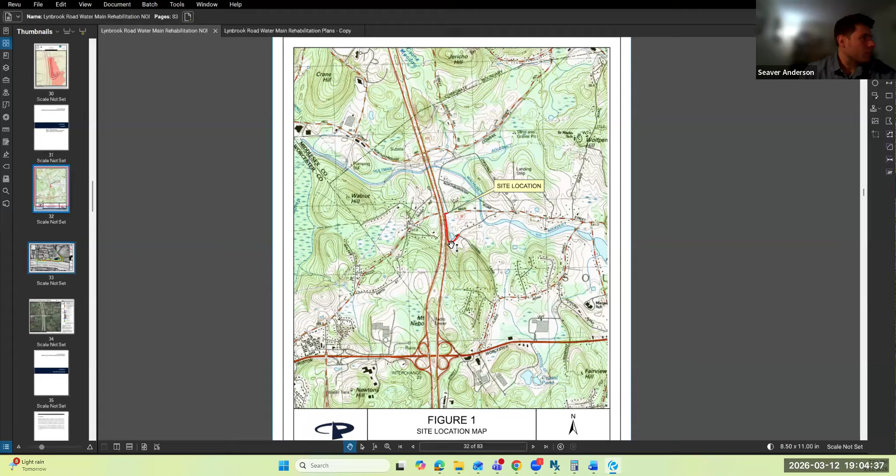Main Street, also State Route 30, runs east to west at the northern end of the project limits. Lynbrook Road runs at the southern end, it dead ends right along I-495 here. So the project is taking place within an existing utility easement and also within portions of both Main Street and Lynbrook Road. You can see it's highlighted in red here.

I'll show you an aerial view of the site. So there's an existing water main in this location. As you can see, it comes down Lynbrook Road, then crosses and runs parallel with I-495 north, and ties into the water main in Main Street.

Wetland resource areas primarily consist of a network of intermittent streams flowing in a northerly direction. Coming from this wetland complex, it crosses under Lynbrook Road via a culvert, enters into a small impoundment - there's a little dam that impounds the stream here - and then continues north into this marsh complex before crossing under Main Street. There are several bordering vegetated wetlands that border on the intermittent streams, as well as several others you can see in blue here.

There are several other streams that discharge from culverts along the toe of the 495 embankment. None of these streams are mapped, or their mapping is intermittent, on the USGS topographic maps. We also checked USGS stream stats, and the watershed size is less than a quarter square mile, with only 14% stratified drift, so they all fall well within the definition of intermittent under the Wetlands Protection Act. So we have no riverfront area on the site, but we do have buffer zone and the local 20-foot no-work zone associated with the wetlands and the streams.

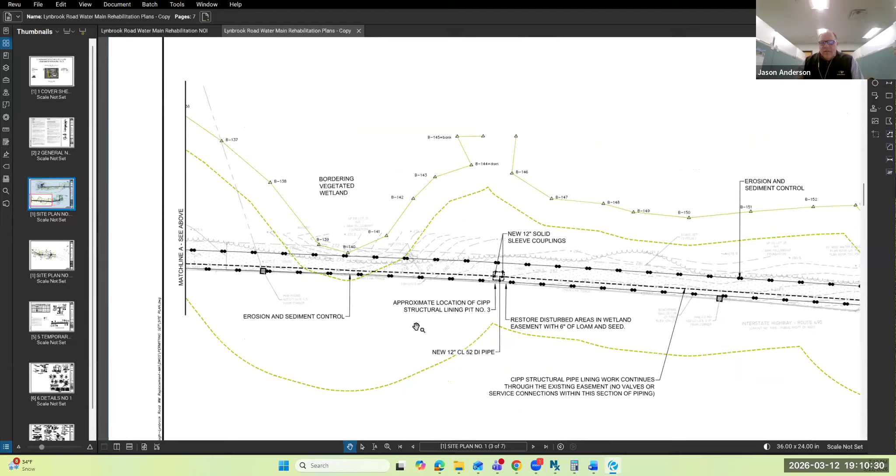This is our third pit. The company that makes this product, Aqua-Pipe, needs to open up a pit every 400 feet or so. So we picked the pit locations to be outside of the stream areas, just to keep the disturbance down. So yeah, if you can go more that way, and then once we come out of the easement...

Then we start heading east up Lynbrook. We're going to replace some of the piping there and just continue up, and we're going to have a couple more of these pits until we get to Lovers Lane. Lovers Lane is where we'll be—part of this project. Hopefully there'll be some money where we can start going down Lovers Lane now that we're out of the wetland area, for regular open cut excavation for water main replacement.

Which is kind of what you typically see. Just some valves we're going to be adding, some sleeves. And then this one residence here, if need be, we'll put them on bypass, feed off the hydrant for them if we need to take their water supply away for a little bit. But again, this class 4 structural liner is used throughout the whole process, inside of the 12-inch asbestos cement pipe.

Probably, like I said, it's the less intrusive way of doing this, versus an open cut all the way through the easement that's in the wetland. So that's the big bonus of using this product, and it's been successful in a lot of applications in Massachusetts.

The total excavation area within the buffer zone is limited to 280 square feet. The nature of just the excavation pits really reduces the amount of excavation needed, and that's all within either maintained grass easement or paved roadway.

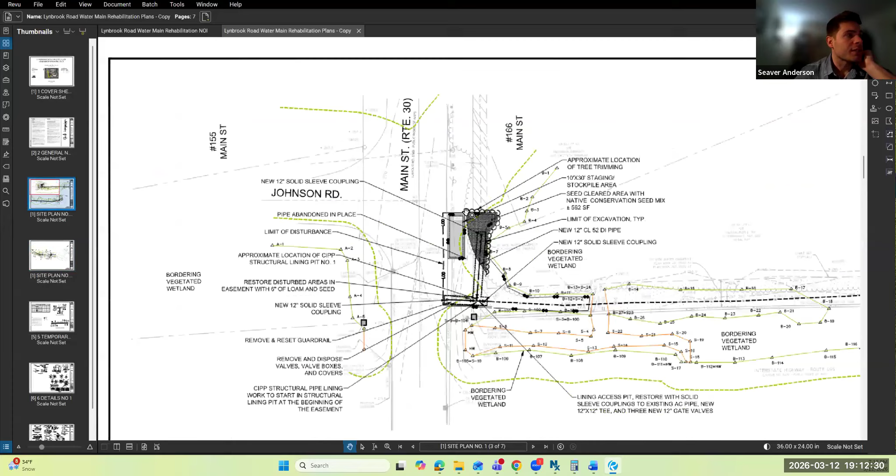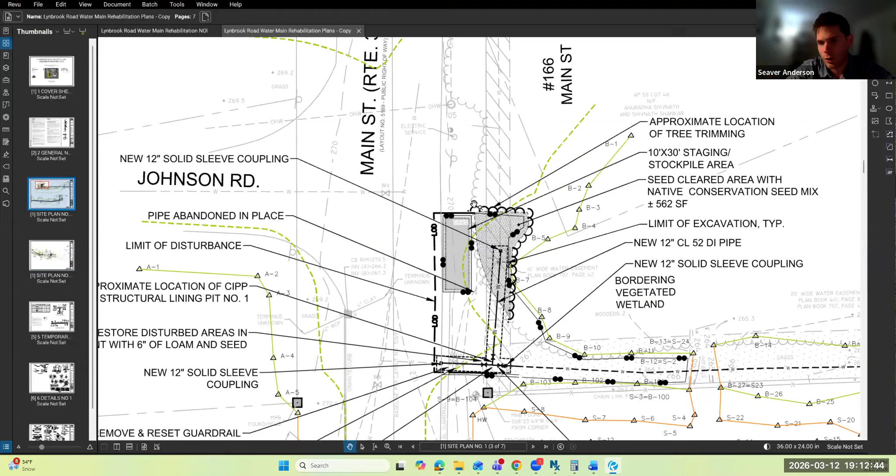The only disturbance in the buffer zone to actual natural vegetation is up at the very northern end. There'll have to be some clearing right along Main Street, clearing this tree line that was provided by the surveyor, more so capturing the canopy. There's some shrub and vine vegetation there, regularly maintained by the state since it's within the state highway right of way. It's subject to pretty regular maintenance by the DOT, but we're proposing that it'll have to be cleared for this open cut, and it'll be restored with a native conservation seed mix.

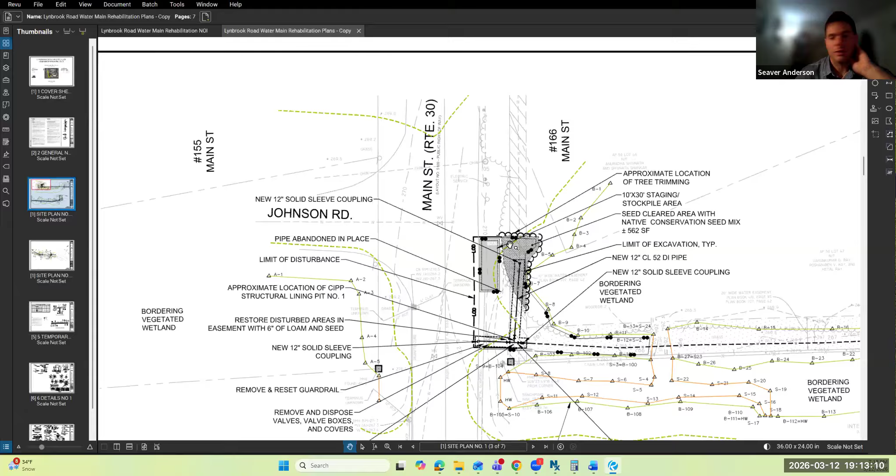Less likely to be cut by the DOT when they come by, but also good for pollinator habitat, restoring that function to the buffer there.

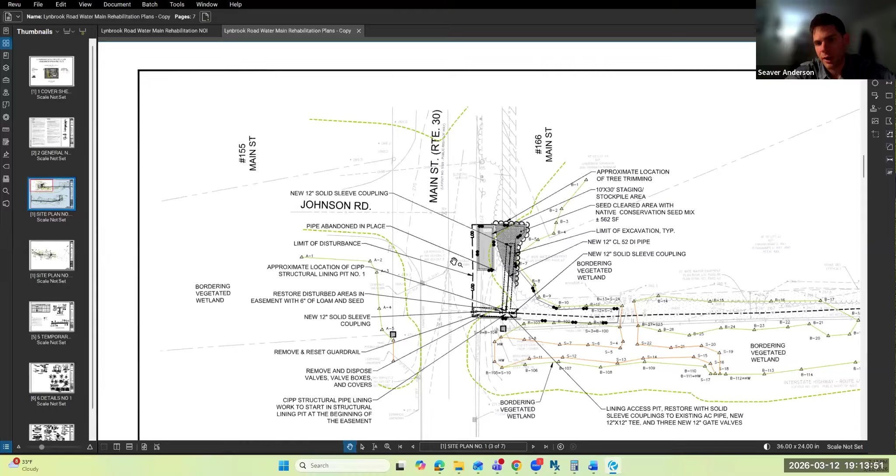It's a limited project. We've minimized work within the buffer zone substantially, as Jason said, by using this method of the structural liner. It does comply with the limited project provisions allowable under the bylaw for work within that area. We have to do some work within that 20-foot no-disturb zone, but the local bylaw does allow for that for limited projects such as this.

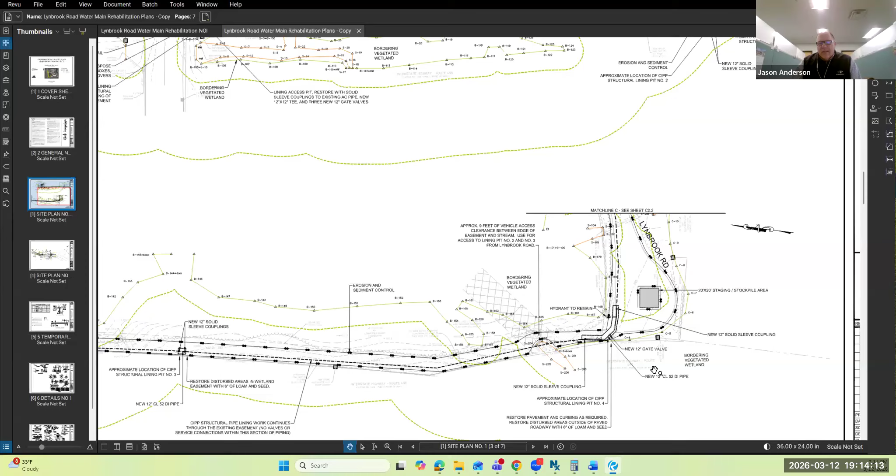One other thing I'll add is on Lynbrook Road, that is considered a state highway, and we've actually just received comments back from Mass DOT for that section of road. There'll be a traffic plan in place for when this work takes place, but the comments are not overly burdensome.

Bill Cundiff, DPW Superintendent, just to expand upon what Jason and Seaver commented on. What initiated this project is we learned that Lynbrook Road was in fact a state highway. We've been having discussions with the state on taking that road back, giving that road to the town, even though we plow and maintain it currently. In consideration of us accepting the road, they're going to upgrade it, repave it. We thought it'd be a good opportunity to do any digging or work on the water main prior to that happening, so that's part of the reason that played into this.

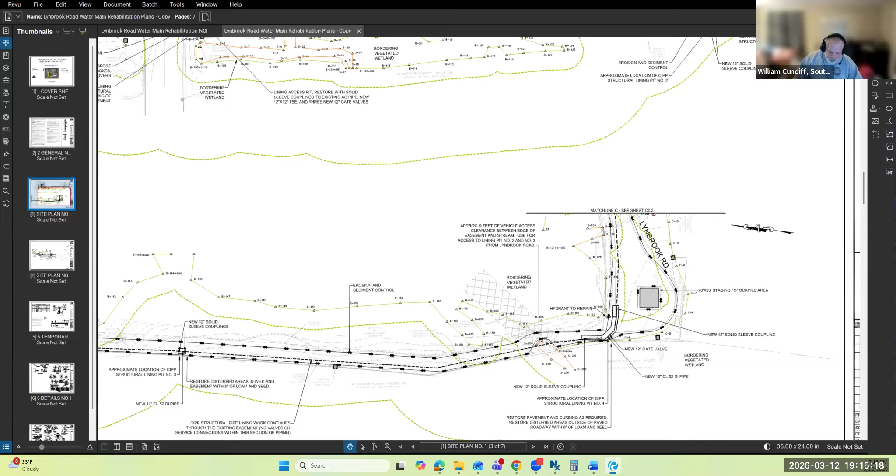Well, you know, they say you learn something new every day. I did not know that was a state road. Yeah, they never discontinued it when they had the new Route 30—this used to be Route 30. Oh, interesting. Okay, yeah.

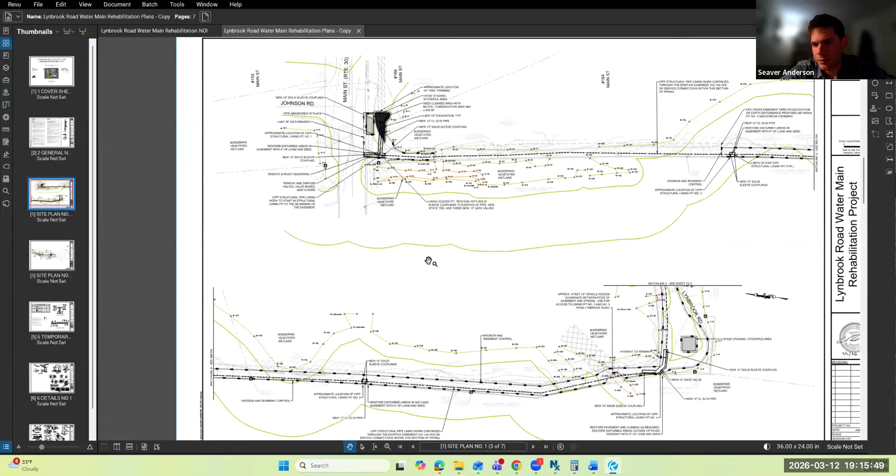Now, as far as the wetland delineation, you're not looking to memorialize that for this application? No, we delineated it, myself and a colleague, but we're not submitting this as an abbreviated notice of resource area delineation, just for notice of intent purposes. Right, thank you.

The other thing I wanted to mention was reminding the board that we did have an emergency certificate issued for a penetration of the pipe that we had to go out and dig up and repair. This is kind of an extension of that emergency certificate.

Let me see, Joe Orzel, our environmental consultant—do you have any comments you want to add here?

Yeah, I've got a couple of relatively quick comments. Just regarding the delineation you brought up, we haven't had a chance to get out there with the snow cover to look at the site or the delineation. We are anticipating being out in the field next week, pretty heavy, looking at a number of sites. And if the commission needs that to be looked at, we will be out there next week.

The applicant had stated that they did a stream stats analysis, and I agree that the streams along the easement are intermittent. There is a stream junction located, based on aerial photos, approximately 200 feet downstream to the west of Main Street, and it looks pretty close, within maybe a few feet of riverfront area extending into the limit of work. So the applicant might want to confirm, first, if the stream becomes perennial at that junction, which I think it might, and second, whether they are within 200 feet. I think they might be just beyond 200 feet, but that should be confirmed with a look at the distance from that junction.

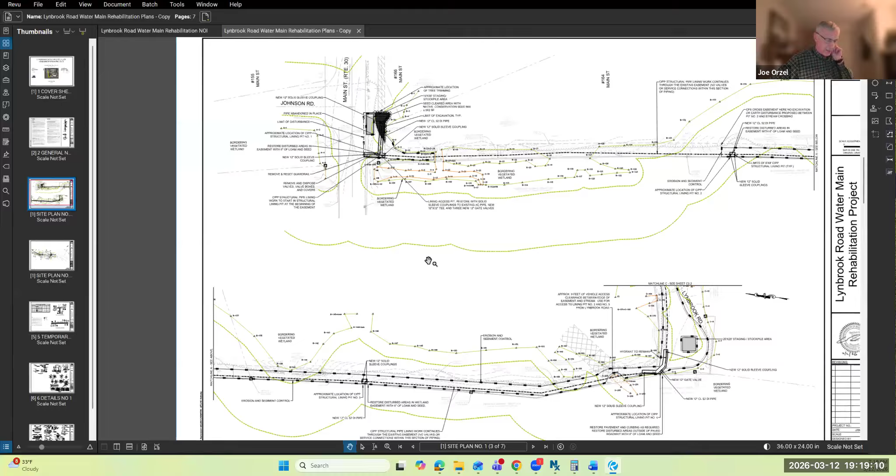On the site plan, there's an apparent stray buffer zone line on sheet C2.2. It looks like a buffer zone line, but it's unlabeled. I'm not quite sure if that's just an error or if it's actually depicting a buffer of some kind and it's just not labeled. So that should just be clarified.

Also on the site plans, the erosion control barrier on sheets C2.2 and C2.1 is not visible due to the match line labeling. Just wanted to make sure it's clear what is proposed in that area, because you can't really tell on either sheet where the proposed erosion control barrier is.

And I think that sums up my comments.

All right, thanks, Joe.

Does the applicant or consultants have any comments back in rebuttal?

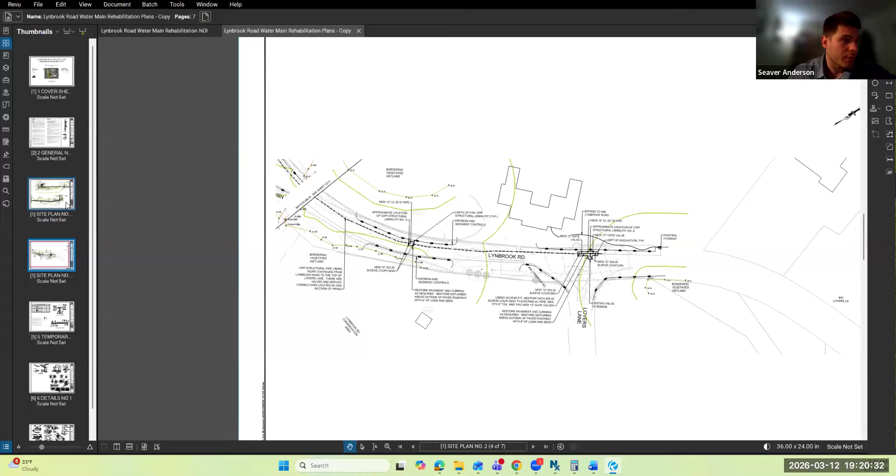I will say, so the stream stats method, we did check - it was downstream, the downstream portion of the work area, downstream of Main Street. I do not think we went all the way, let me see, to the junction. You're talking about the junction that's off screen here somewhere.

Correct. It's just about 200 feet from the limit of work, or just beyond 200 feet from the limit of work based on aerial photographs. But yeah, roughly where your arrow is, in that general area.

Okay, yeah, we can confirm. I'll have to check the stream stats report to confirm that, but we did take it, I believe, in this area, downstream of the Main Street culvert.

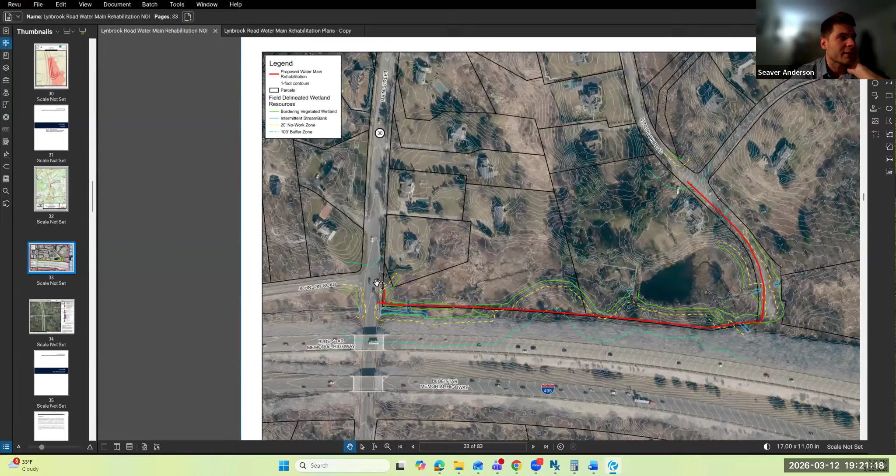I would say even if that riverfront area does clip the northern end of this work, it would really just be the work that's probably right here, right along Main Street. So I'm not sure that tiny bit of riverfront would have any effect on the decision or order of conditions.

We can take a look and estimate it, and get back to you, but no, I would agree. I think just for the record, whether or not any work is occurring within the riverfront area.

Yep, understood. Jason, did you want to speak? We could potentially condition that. Okay, yeah, if that's something that could be conditioned, we could definitely provide that pretty quickly.

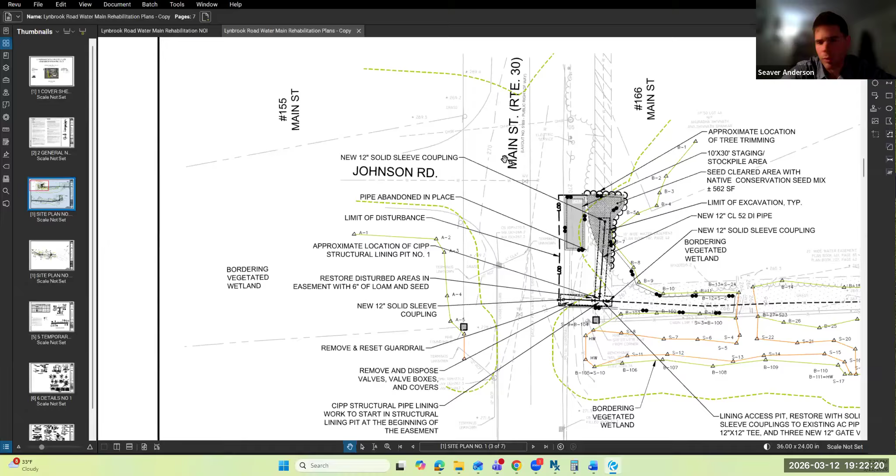Uh, Jason, do you want to speak to the dewatering details? Sure.

Or do we show a detail on the plans? I think nothing on those, we do, yeah. I think...

So we discussed with the contractor, we'd have this sort of arrangement here, where they would be pumping into like a settling basin. We don't anticipate - I mean, when we did the borings there was obviously water, but hopefully there won't be a lot of dewatering going on.

I think most of this piping is 4 or 5 feet below grade, so when the contractor digs these pits, we just need about a foot underneath the existing pipe to conduct the work.

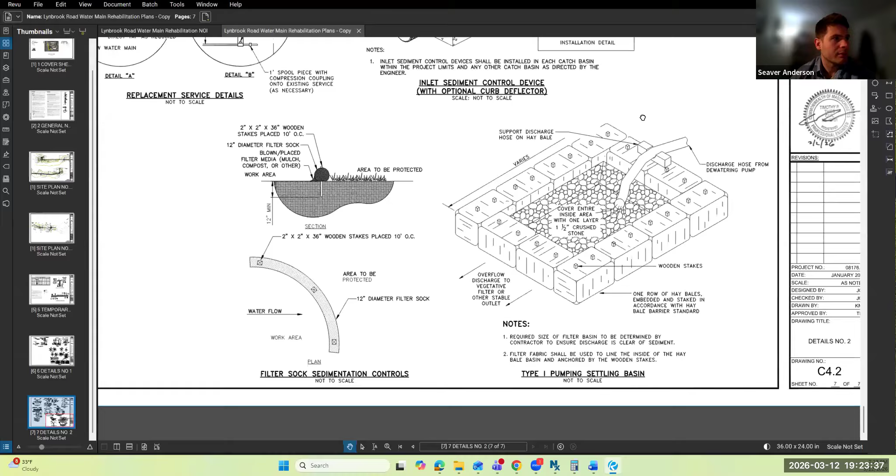I mean, would this detail - is more needed to satisfy that comment? More than typically, this is what we'll include as our dewatering detail. If you need a more detailed description of this configuration, we could provide that, I think, in narrative form.

One quick change would be the reference to hay bales - could you replace that with straw bales? Yep, thank you.

And just for the commission's thought, something that we usually do for these types of projects, especially when a contractor isn't known, because a lot of these do state the contractor should find their preferred areas for dewatering setups.

That the final location and setup be reviewed and approved by the agent prior to the start of any dewatering activities. So that can be a condition within your decision.

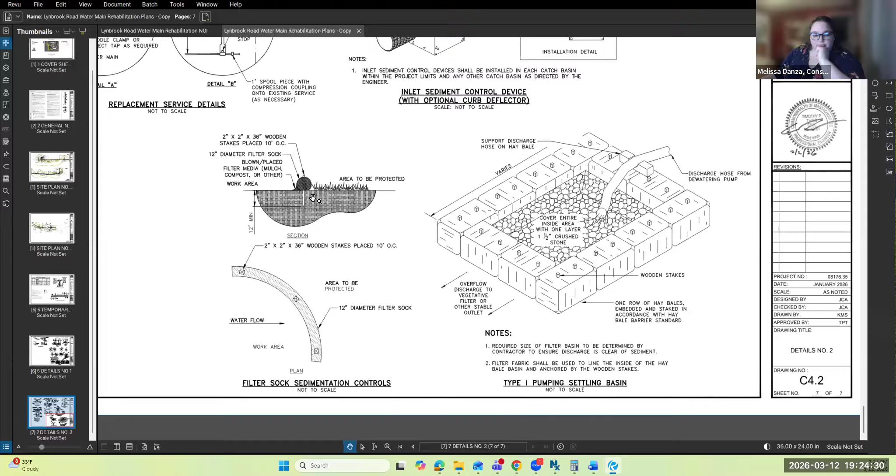When is this work planned to be done, or start? We're going to, after we resolve all the Mass DOT comments, and then from here, then we're looking to...

The bid docs are all ready to go, we just have to make a few changes to the final drawings. But looking to go to bid, I would think in the next 3 weeks or so.

Okay, a month, something like that. Something like that, okay, yeah. So probably this summer wouldn't be out of reason, probably, right, Jason? Or start of work. That's right.

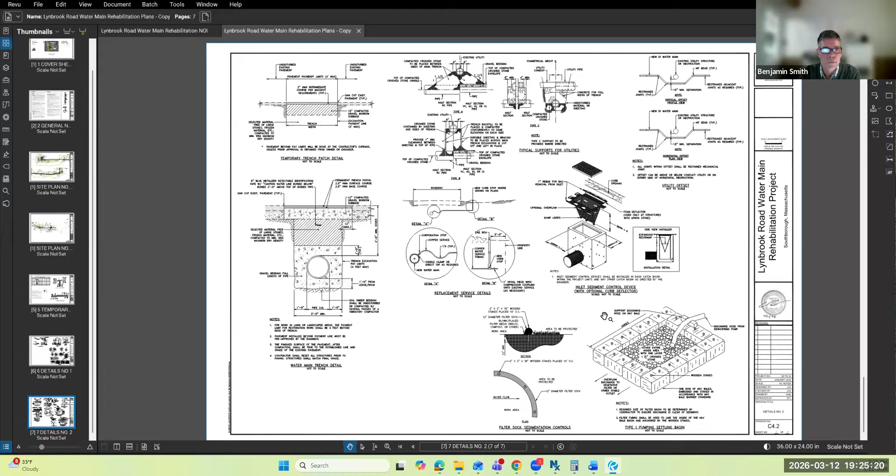I'm just asking whether we need to rush to close this with a lot of conditions, or if we've got time to get drawings and language updated to close at our next hearing. You can certainly take as long as you need. We're ready to go, but the bid process alone will take a month, so we're out two months before we actually award a contract. That's good to know, because I'd rather get our I's dotted and T's crossed rather than condition everything crazy.

Other comments from commission members?

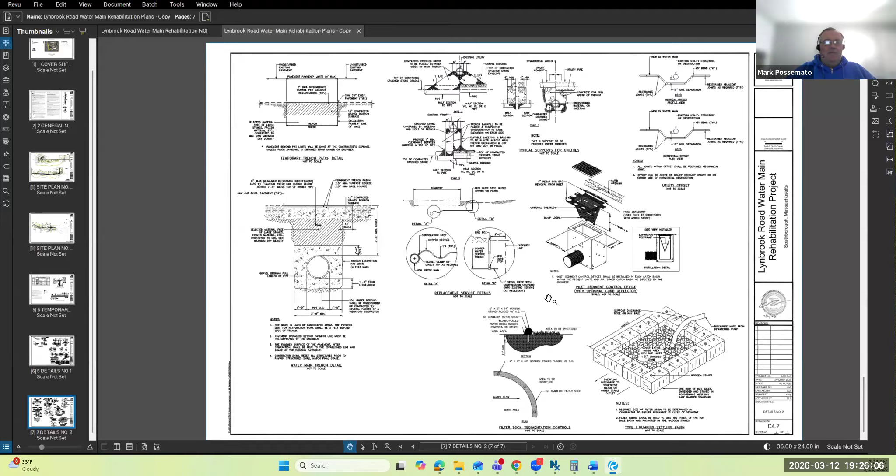I'm glad to see this technology being used in a water main. In just about every case it's going to be less expensive than cut and cover, and the durability is pretty astounding. I'm familiar with its use in sewer projects, but this is a perfect use case for it. It's interesting that you're putting a liner in the pipe, which does reduce the diameter a little, but because the liner is so much smoother than the AC pipe already there, you end up increasing the flow capacity of the pipe.

One last thing, it's really interesting to see the process done if anyone goes out to watch it. We tried to get Bill and his crew, had a project lined up, but it didn't happen. We'll try to get something set up. It's an interesting process, really cool to see it done. Looking forward to using it here.

Any other comments from commission members?

I was just going to say, in those pits that we'll be digging, the section of AC pipe will all be disposed of properly. That's what we'll replace with ductile iron, but not too much linear feet of that.

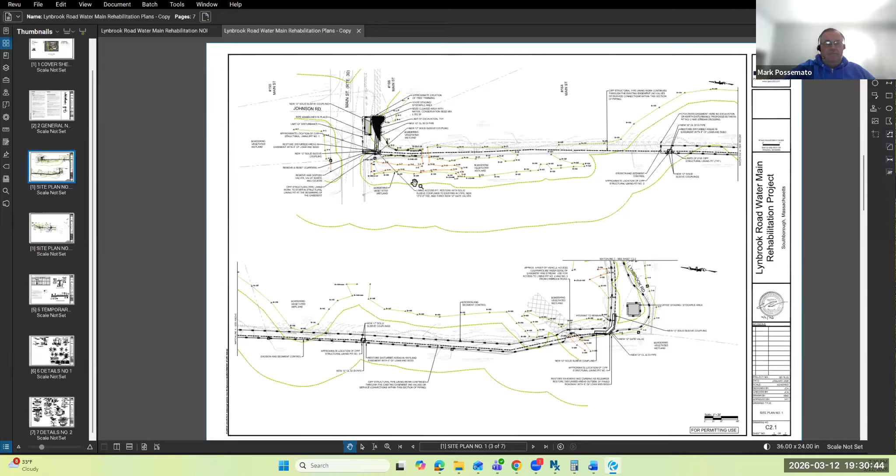Okay, next up we have notice of intent, stormwater management permit, 0 Southville Road, map 5, lot 8, construction of 2 apartment buildings and associated site work.

In accordance with the Wetlands Protection Act, Mass General Laws Chapter 131 Section 40, the Southborough Wetlands Bylaw, and the provisions of the Southborough Stormwater and Erosion Control Bylaw, Southborough Town Code Chapter 154, the Southborough Conservation Commission will conduct a public hearing on Thursday, March 12, 2026 at 7:10 p.m. by a virtual Zoom meeting.

The commission will consider a notice of intent for a project located at 0 Southville Road, map 5, lot 8. The applicant is Apartments at Southville Road, LLC. The project description is the construction of 2 apartment buildings and associated site work.

Good evening, board. James Benincasa, Southville Road Apartments. So yes, we have 3 buildings, 2 buildings and a clubhouse proposed at 0 Southville Road. It's about a 4-acre site. It's in the MBTA overlay district.

Scott Heim went out and flagged the wetlands, and survey was done by Kevin Jarvis. After we did the flagging and locating, we submitted the plans and found out there was an ANRAD that was done quite a while ago, right Melissa? It was like 2021, maybe. So there was an ANRAD done in 2021. We found that out afterwards, and obviously with the snow we haven't been able to go out and confirm that or walk the site.

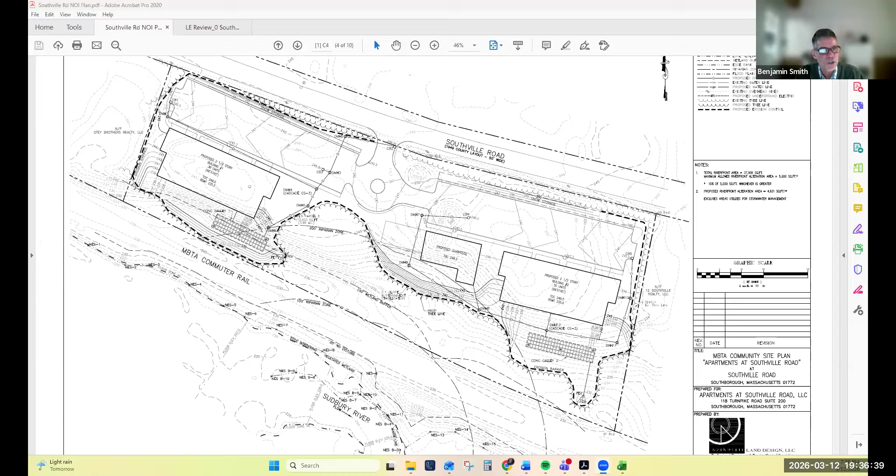Thank you. Along that same line of thinking, another thing that even at this early stage needs some discussion: going back 4 or 5 years, there was some clearing that took place here within the buffer zone and, I believe, riverfront area, which we addressed through an enforcement order. I'm wondering if at our next meeting Melissa could post some of those documents to the SharePoint so we could see where the disturbance was, and give us a rundown, or Joe, if you inspected any of this, what restoration was done. I ask this with an eye towards identifying what land was previously disturbed legitimately under the Rivers Protection Act, versus land disturbed illegally that was supposed to be restored, so we don't accidentally include stuff from this violation from a few years ago.

Of course, and Ben, I can go over a couple things quickly so commissioners can percolate on that in the meantime. So the ANRAD that we've been discussing was the end resolution from that violation. What happened back then, and that ANRAD, because of the permit extensions from COVID, is still valid, at least for a little bit longer.